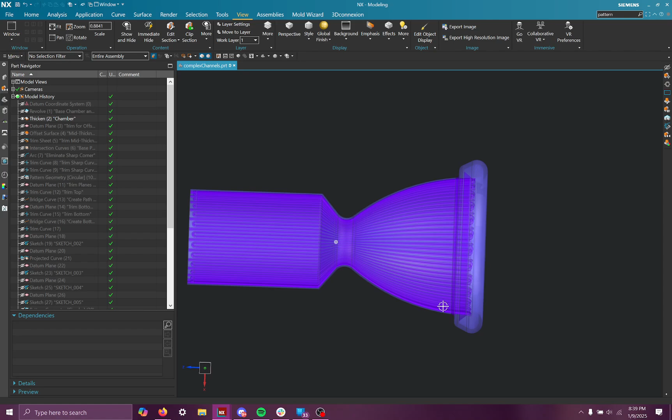So I made this regeneratively cooled chamber demo to show off some of the other channel making methods. This is very rough. None of my sketches are really constrained here at all, and I pretty much guesstimated what everything looks like. So definitely don't take this with any type of absoluteness about it.

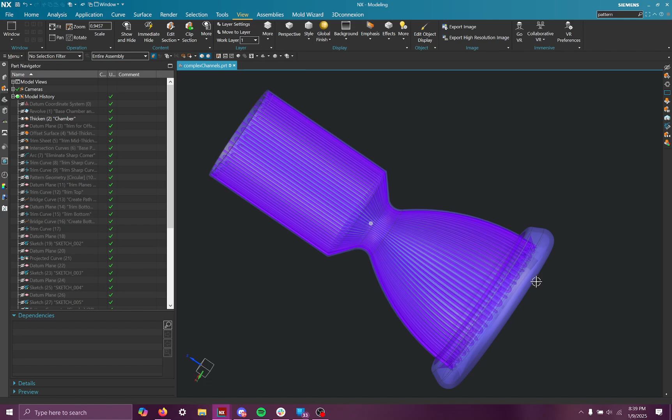This is just kind of using a familiar shape of a regen chamber to show off how to route some more complicated channeling through a curved geometry. And I think there are some useful aspects of doing this type of demo because I included varying channel thickness, or channel area, I guess, going through this chamber. Like it gets much thinner, kind of hard to see, but it gets much thinner by the throat and widens out as it goes through the nozzle.

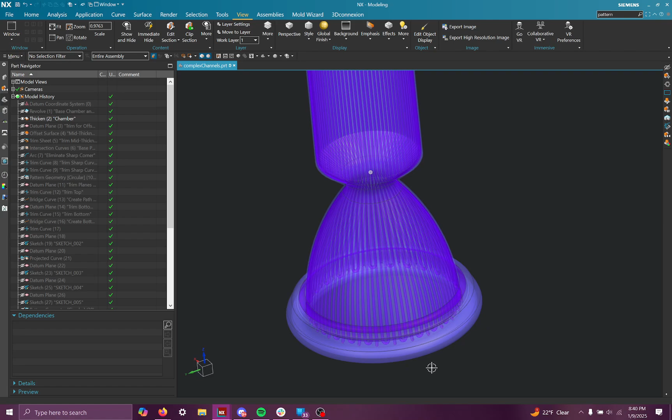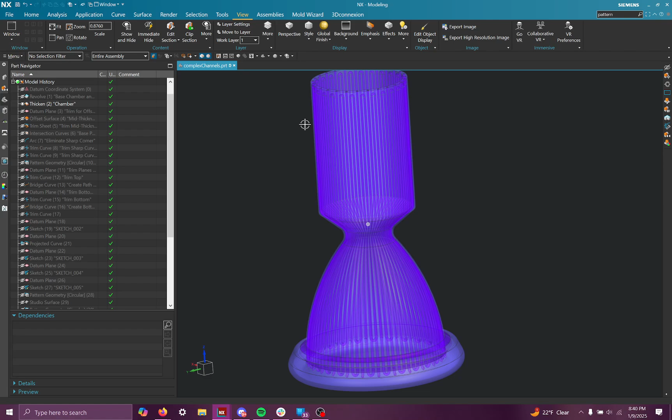And it's also a triple pass, very arbitrarily made a triple pass. I just wanted to show off some more channel making stuff by making it a triple pass. But in this video, I'll show you through the process that I used and point out some of the problem areas that you might face if you try to do something similar. Because while I think I found a pretty good method for this, there are definitely issues with it and possible areas of improvement as well.

All right, but let's get started here. I already have it made, of course. I'm going to mostly just be stepping through the timeline, and maybe I'll make a separate video where I recreate it from scratch, but obviously that'll be quite a bit longer than what this video is.

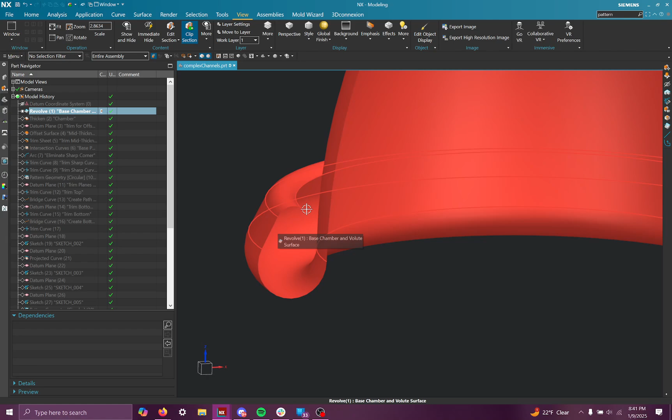But to start off, this is my base revolve. It's a sheet body for the chamber, and also I included a little bit of the geometry for the volute. I didn't do anything fancy for the volute, like changing area, going around the nozzle exit. I just kept it simple. This wasn't really about the volute anyway, so.

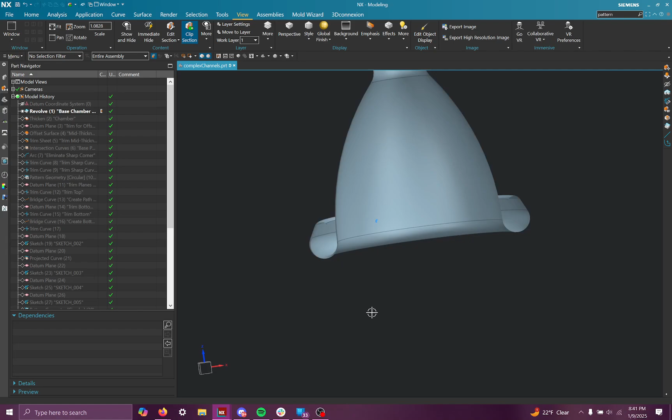But one thing to note is I didn't close out this volute because otherwise it wouldn't let me revolve this as a sheet body. It needs to be open at both ends to be sheet body compatible. But otherwise, this is just the outline for what the chamber will look like. And then I pretty quickly thickened it to make it into a solid body. I think I applied like 0.2 inches to it. But again, none of the dimensions really matter for this stuff.

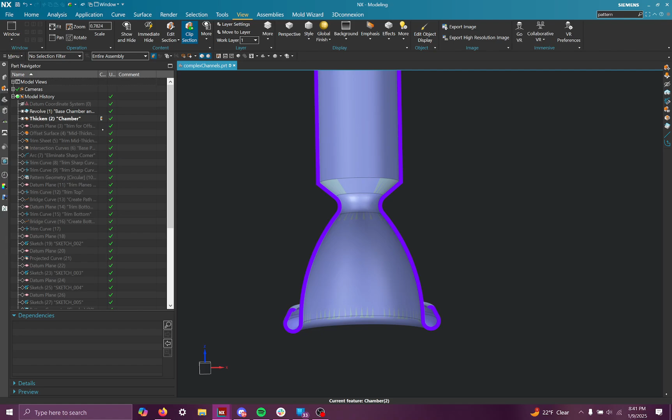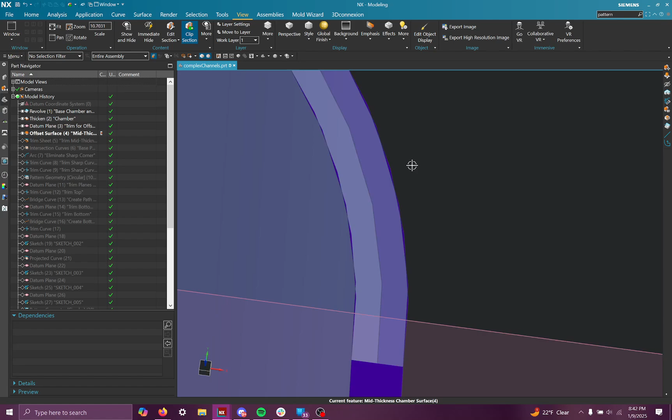Okay, so then I knew that I wanted to create a surface that is placed within the middle of this thickness, which actually, if I jump down one more step, you can kind of see it there. I'm going to hide that revolve there. Yeah, see that little gray surface in the middle? That is used as a surface to create a curve from for the initial path that the channel will use.

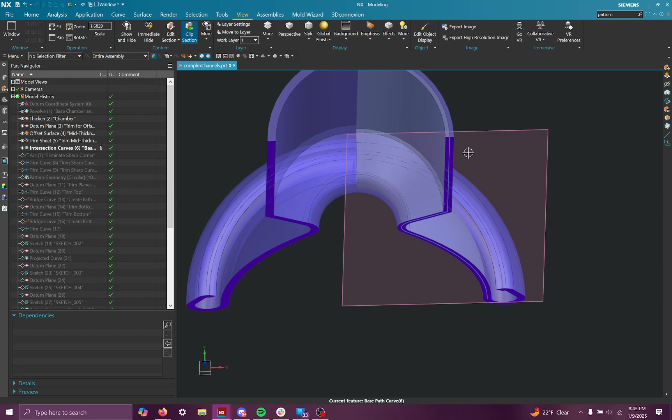And the reason I have this plane here is to trim down that surface in the middle so that I don't have two curves. So if you ever use intersection curve to make curves from intersecting sheets or planes, if you have a set of surfaces that intersect twice, it'll create two separate curves in the two places where it intersects, and I wanted to avoid that.

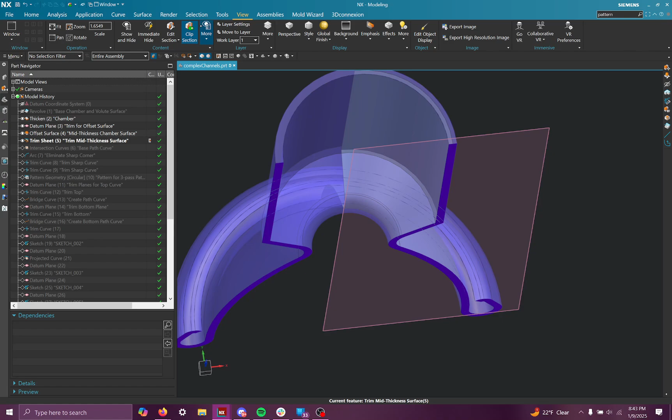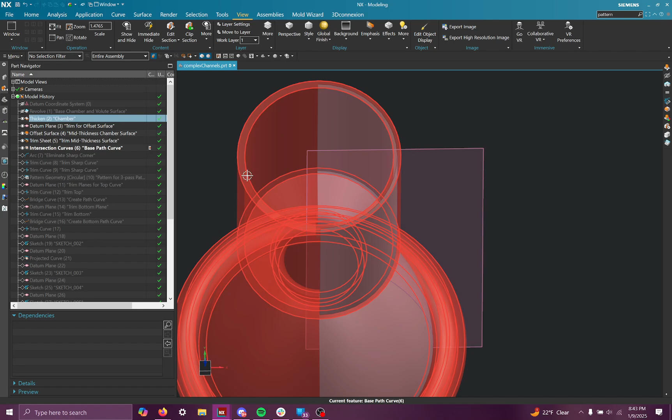And by doing a trim, I made this trim sheet that cuts down on this sheet body. So this is it originally. I cut it down to be just that, so that when I used this plane and I used this sheet, it created one curve instead of one here and then one on the other side. That just made my life a little bit easier going forward. Very long way of explaining that.

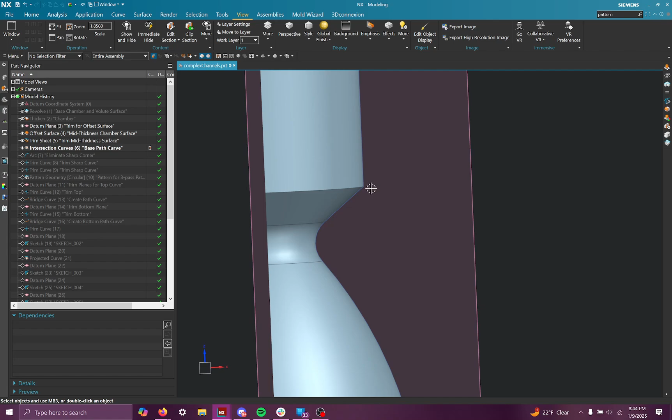So after I got that part of it, one thing I wanted to highlight before, the way I designed this chamber was very intentional. I left in a sharp corner without a smooth curve transition here, because that is kind of an edge case that you need to address once you want to use your chamber profile to eventually be your path for the channeling. So I addressed that. Let me get rid of this trim sheet.

I addressed that with adding in a little arc, and you can find the arcs from the curve tool, and you need to pretty much define a plane for that arc to operate on, and then it's almost like you're in a sketch.

You just use a 3-point arc. Click on that line and then that line, set them tangent, and then define the radius. It's a pretty simple tool to use, especially if you want to avoid being in a sketch. So I made that arc to clean up the geometry a little bit and avoid

using this sharp cusp almost in this corner. And then, you can't see it, but I trimmed out these two lines here to only allow that curvature in this curve that I'll eventually use to define part of the path for the channel.

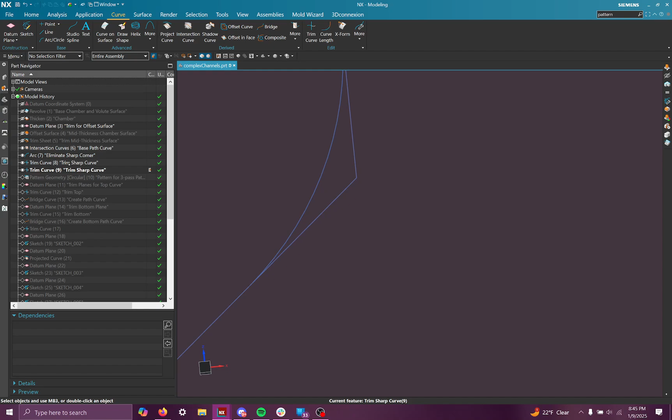But trim curve is weird. I don't know why it does this, but it's always hard to change whether it's viewable or not. Sometimes it is, sometimes it isn't. It doesn't show up after you apply it. You just have to trust that it worked sometimes.

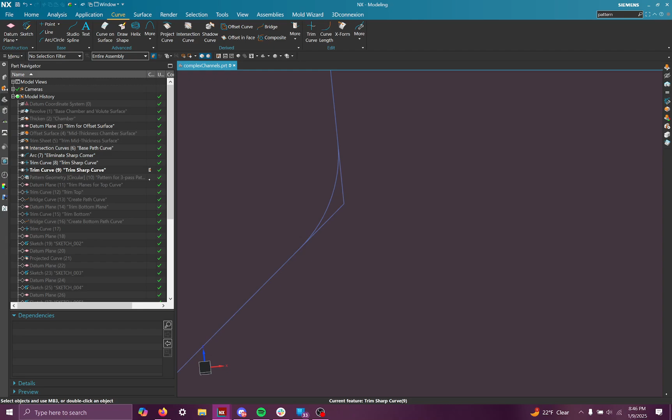But imagine these two straight bits being trimmed off. And then with that, I knew I wanted to do a triple pass with this Regen chamber, just to demonstrate some more complex stuff.

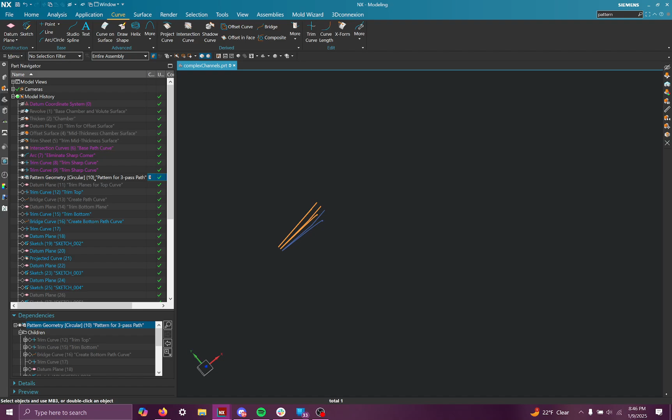So I used pattern geometry to pattern that intersection curve with the added little arc there 3 times, and I picked that was my parameter for the span angle.

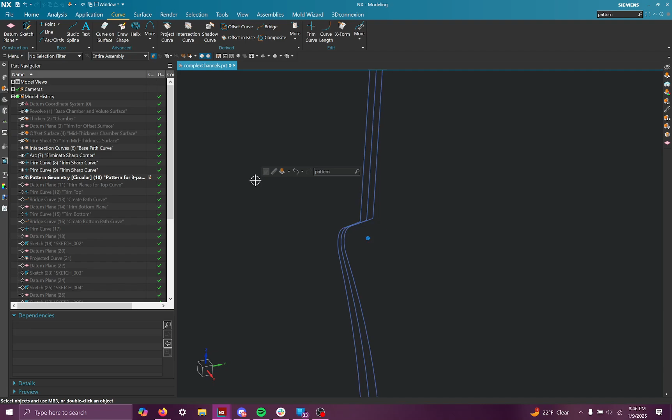Very arbitrary again, but one thing to note here is I'm using pattern geometry instead of pattern feature. I typically like to use pattern geometry when I can because it tends to be a little lightweight, a little more lightweight compared to pattern feature. And I don't even, that's typically why I use it.

Sometimes you have to use pattern feature though. This case doesn't really need to be lightweight since I'm only doing a 3-pass pattern, but regardless, after that I

made another plane. I tend to define a lot of planes to help trim down stuff, and this plane is used to trim down the top parts of, that's our chamber, the top part of the chamber channel curves, specifically

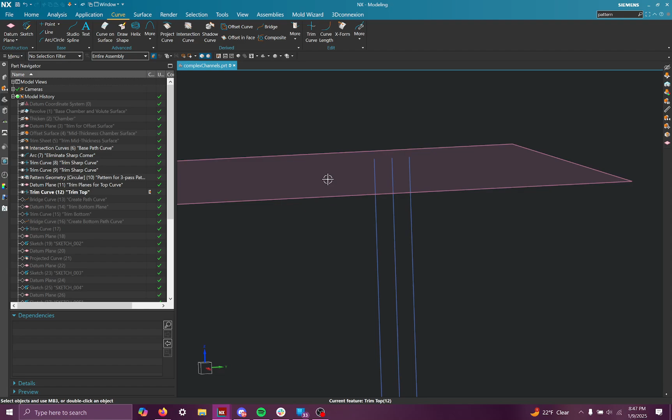these two. I trim them down, and of course it isn't going to show it when I move on to where I do that operation, but I trim down these two lines at that plane to eventually make room for a nice curvature with which I make here with the bridge tool.

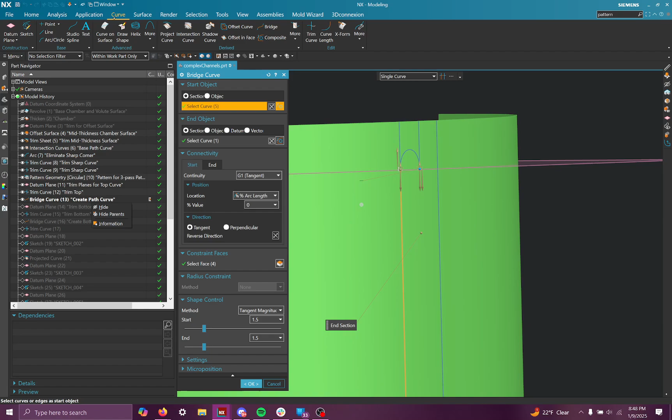The bridge tool is really cool. I think it's pretty useful and very versatile, and it's not something you need to enter a sketch for. You can just use the curve menu, and it's right there. You pretty much just click on the 2 lines you want to connect, and it will automatically make a curve

to connect them that keeps tangent, keeps it to be tangent to both the initial curves you selected to connect, and you can adjust what those tangents look like by a shape control.

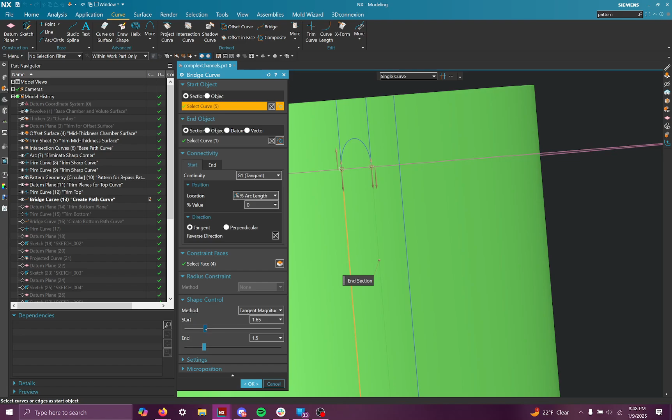And the part that makes it really useful for this case, where we're having these channels curve around a little bit to match the radius of our chamber, is you can constrain this bend, this little bridge here, to a face.

So I selected the trim down mid surface that I used to define the initial curve from as what this bridge should adhere itself to.

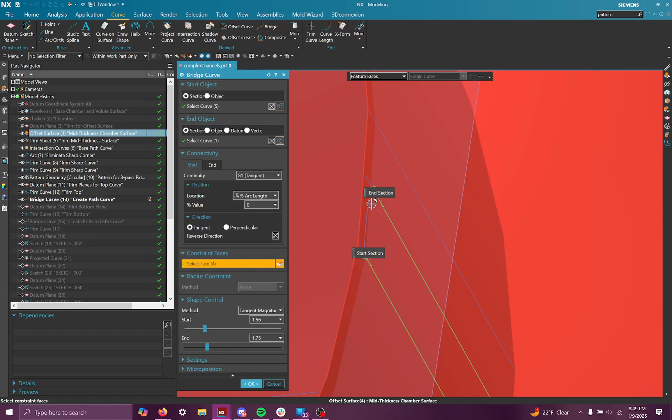So it's sticking to this curvature as it arches over, which otherwise it would just take the shortest path, which would intersect with this face here, which is not what we want.

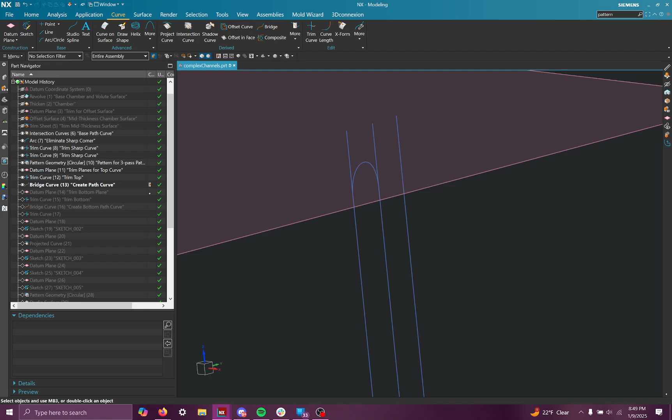So it's a very cool tool. I recommend it when you ever need it. And I do the same thing at the bottom as well.

This plane is a little bit out of where it should be, but it doesn't really matter for planes. But this plane is just used to trim off.

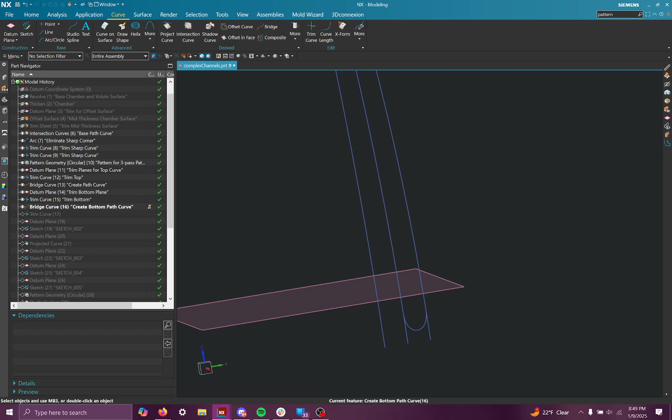Instead of these two curves, I trim off these two curves to add in another bridge using the same methodology of adhering it using constrained faces to the trim surface, the surface that goes through the thickness of the chamber that I used to define that this original curve profile.

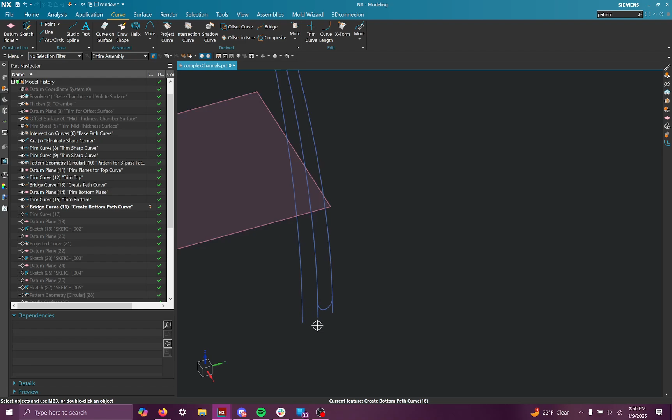And then I used trim curve to trim out those two straight bits that extend past that bridge. Okay, so after that, we have 3 nice connected and continuous curves that we'll use for our eventual path for a channel.

Now we have to define the profile of the channel, and that's pretty simply done as well. We just need a very small plane here. I'm gonna have to zoom in a ton. This plane is, I believe, an on-curve plane.

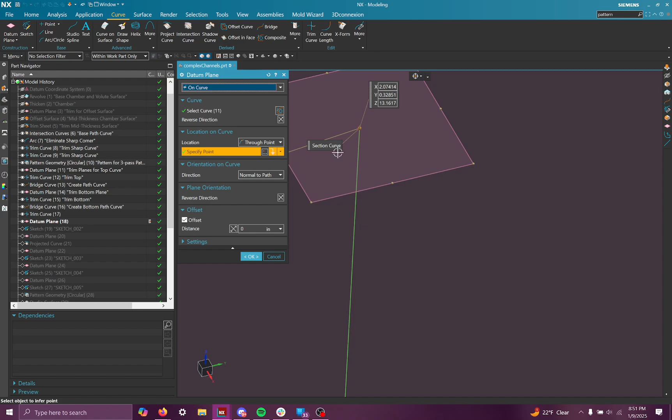If you are unaware, there's a ton of different ways you can define planes, and more likely than not you can find one that works for you. There are at least 2 that work in this case. One of them is point and direction—you pretty much just click on the endpoint of this line and it'll populate that plane—but I did on curve for this one, which also works. So we define that plane at the end of this curve.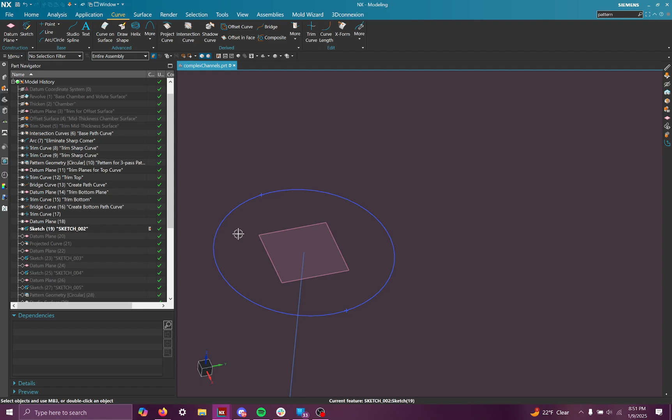Then I pretty basically just drew out a circle, about 0.1 inches in diameter. You might notice these 2 points—I might talk about them later. They were almost a debugging tool that I used later on, and we might end up talking about it, but I used a circle as the profile for the channel.

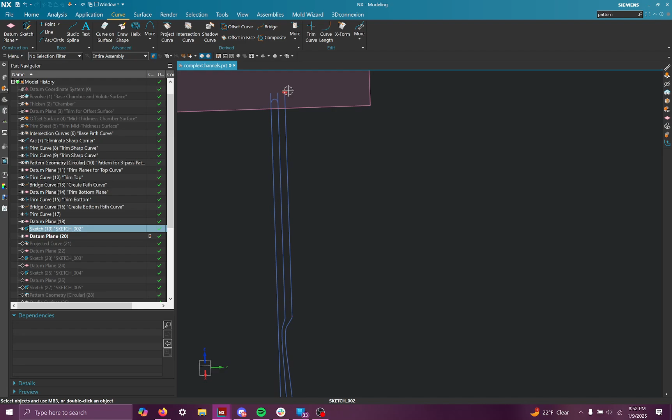If you want it to be more fancy, you can maybe use a teardrop shape if it needed some overhang, but circle it is. I knew I wanted to have changing diameter, or changing area, of the channels going through the path. Earlier tests I did with this method, without having a changing area, kind of looked weird because you'd have to have really skinny channels throughout the entire thing to make them all fit in the throat area where the paths get a lot closer to each other, which isn't something you would probably design to be like that.

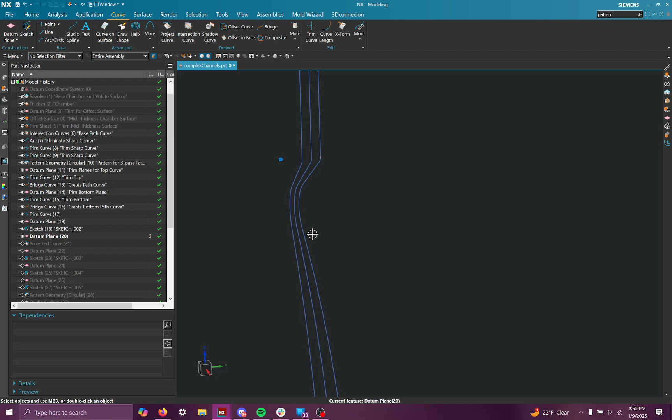I think typically you have changing channel areas for heat exchangers like this one, so I wanted to demonstrate that a little bit. To do that, I'm going to define planes going throughout the length of this curve. I only define planes along one curve, and then I will eventually pattern them to the rest of the other 2 curves.

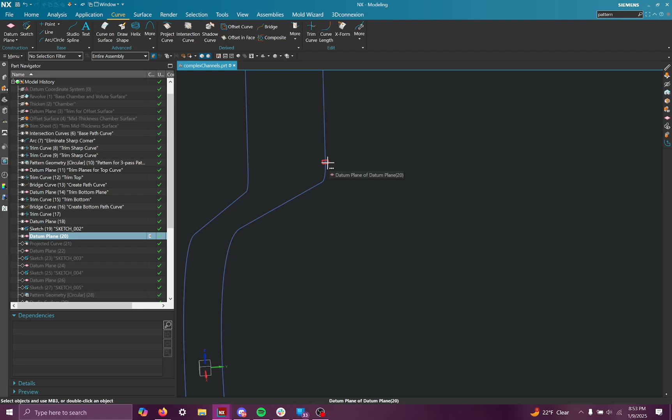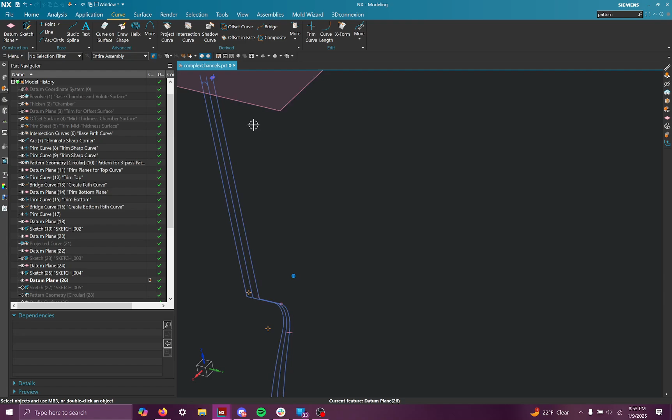So we're only going to follow one curve for now, but I'm defining planes at places where I anticipate a change in profile for the channel. So here's one of them, here's another, there's one, and then there's one at the end as well, right there. At each location where these planes are, I'm changing the diameter of that initial circular profile for the channel.

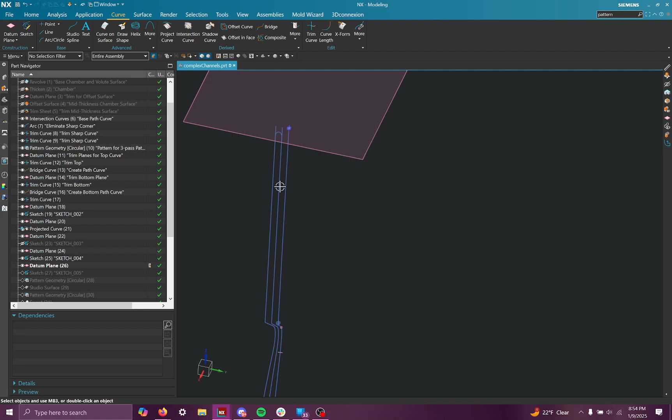I actually do add in the profiles for the channel. This one is just a projected curve from the one up here—I just drop it down using this straight line as a vector. You can also make it a sketch there. I think it's a little weird that I, out of the blue, used a projected curve instead of just a typical sketch. Then I made another profile for the channel.

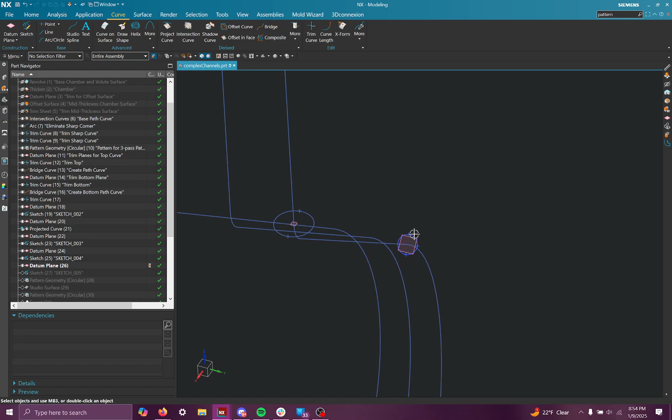This one is noticeably thinner as it gets closer to the throat—you can kind of see the difference. I made another one there, at the next plane location, and then I have the final one down here, which goes back to a much wider channel width. So you get a varying channel diameter through the path.

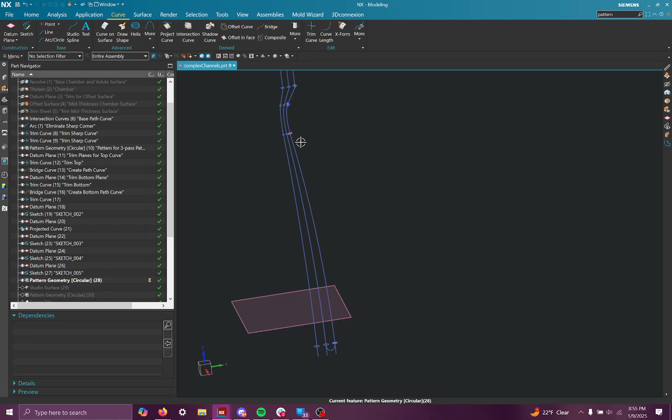I anticipated having the same change in diameter as it goes up and down again, which is done by the pattern geometry, where I take the list of these different channel profiles and just pattern them through the other two paths.

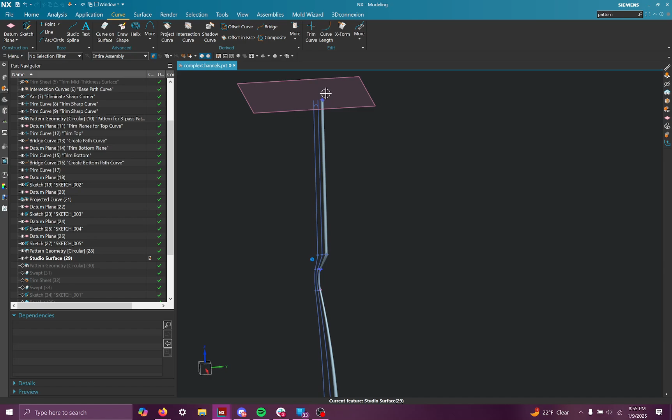Then we really get into the more complicated stuff, and I had a doozy of a time trying to figure out a good way to complete this sweep from the top to bottom using this relatively complex curve guide. I guess not too complex, since it's on a plane, but having it change diameter was pretty hard to find a good way to do.

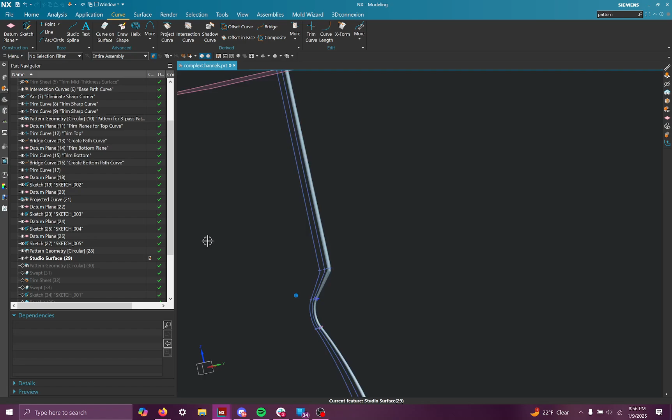I'm not entirely happy with this. This was just the best way I found, which was using a studio surface, although I'm pretty sure a sweep, just a simple swept tool command, would do the same job. The key was using the alignment by points, and really just trying to be careful about how you align it by points.

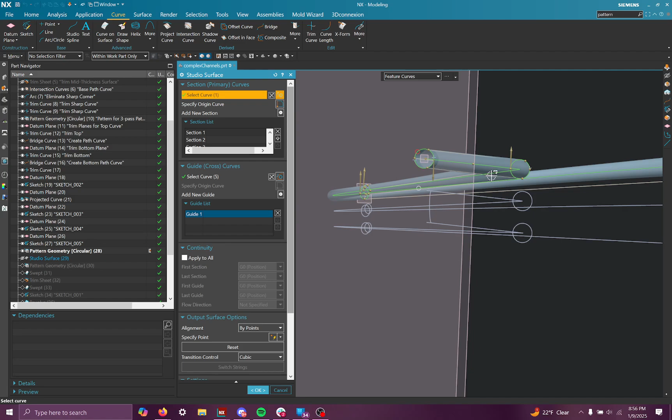When you initially make it with swept and circular profiles like this, it'll be all twisted up. It's very annoying—you pretty much have to hand sculpt this.

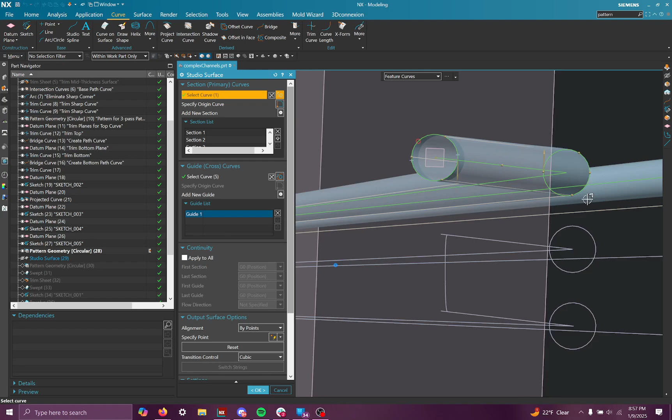Studio surface, or swept, to make it look the way you want. Realistically it probably isn't going to be entirely dimensionally accurate. I'll do a little demo of what it was like—you have to grab these tangent points and move them around, and you can see I'm changing the shape.

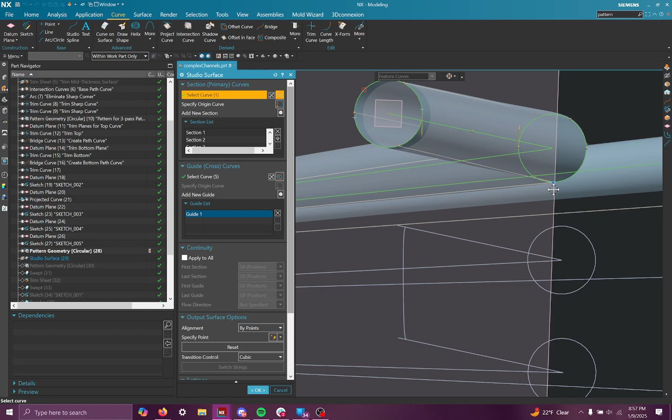of what it looks like between those two circular profiles. And sometimes you get these weird conditions where it's snapping to somewhere you don't want, and it messes everything up. So imagine that, but everything is all twisted up to start with, and you have to do it through the entire length of this channeling.

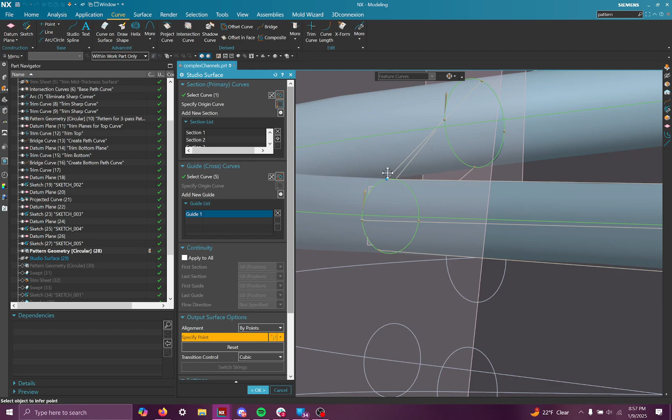It's a little bit annoying for sure. It probably took me like 5 minutes to do the whole thing, which isn't the worst, I guess, but isn't ideal either, and you're probably getting a subpar product by the end of it. So if you have any better ideas, definitely let me know, because this can definitely be improved.

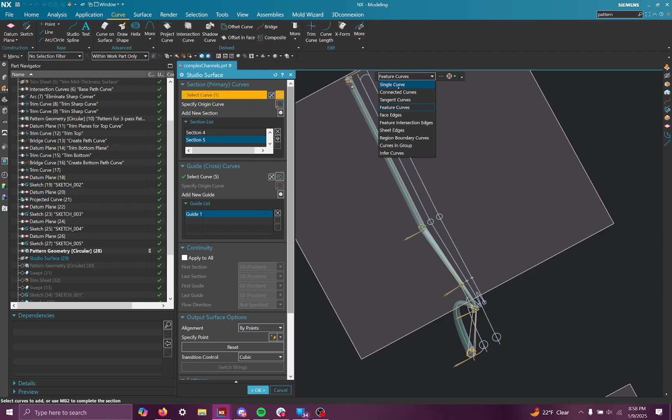So yeah, besides the point—or I guess part of the point. To start, you just select each one of the circular channel profiles as you go down this path. Each one of these sections is another circle; you can see the changing highlight there is another one of those circular profiles. And then the guide, I just used a single curve here, carefully selecting the continuously defined curve that I wanted.

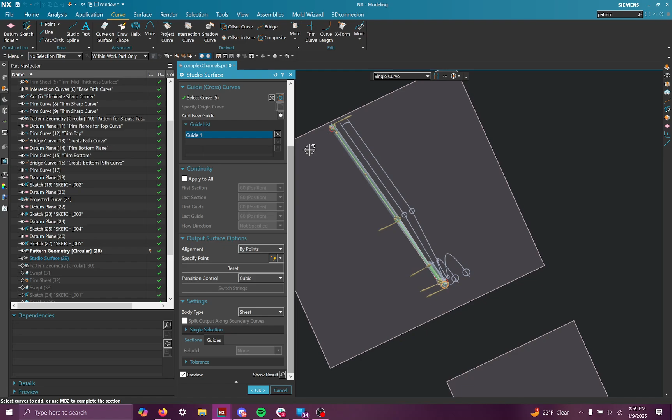Another good point: the body type I used for this was sheet, because I wanted to eventually use trim body to cut out the negative, or essentially add in the channeling instead of a subtract. I found that using surfaces like this and using trim body tends to be a bit lighter weight and has a quicker load time than just using subtract—you can have multi-minute loads using subtract on complex stuff like this. So to keep it lightweight, I chose a sheet surface body. Can do it either way though, honestly.

Okay, so that was definitely the hardest part and most tedious. In fact, it took me several hours to settle on using this tool. But yeah, it worked pretty well.

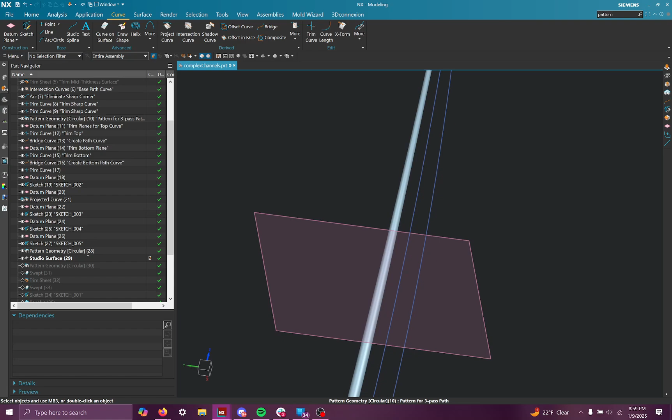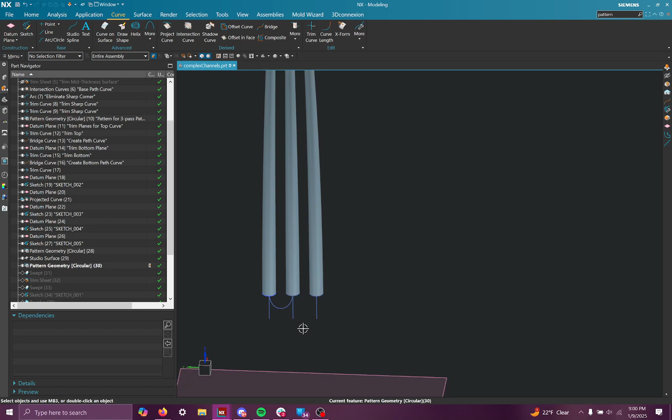Then after that, I patterned that sweep, or that studio surface, 3 more times. And you might be wondering why I bothered originally patterning those paths if I'm only doing one sweep and then patterning the swept afterwards. The real answer is I didn't really know what I was going to do, so I figured I'd need to pattern the paths, the curves, 3 times just in case. So there wasn't really a lot of forethought there, but eventually it was needed.

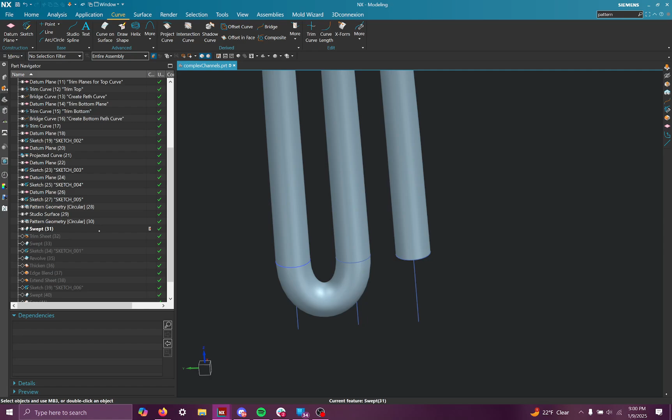The next thing I did—obviously these are 3 independent channels right now, not connected by the bridges we made earlier—so I added a little swept that uses that bridge curve as the guide for adding in another surface. And then up here is just a trim to bring down those sheet bodies to be at the same level, taking advantage of that bridge again, which is done there.

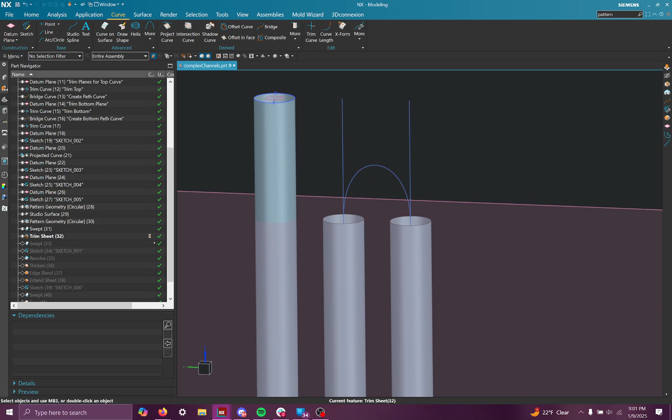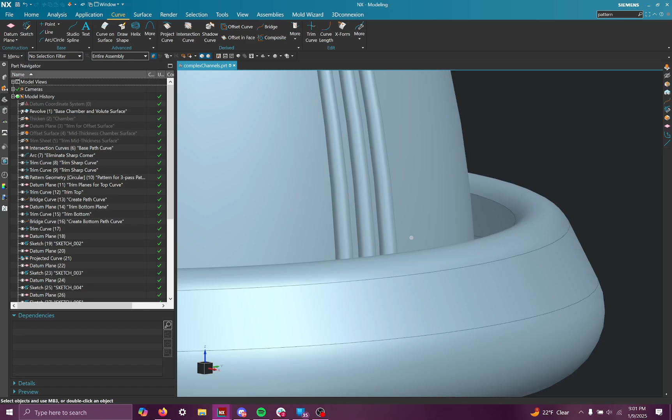We're kind of in the home stretch here. One thing I needed to do is handle this little entryway to the channeling. If I go back here and show you what our volute looks like, I needed to find a way to get this channel opening up in the volute.

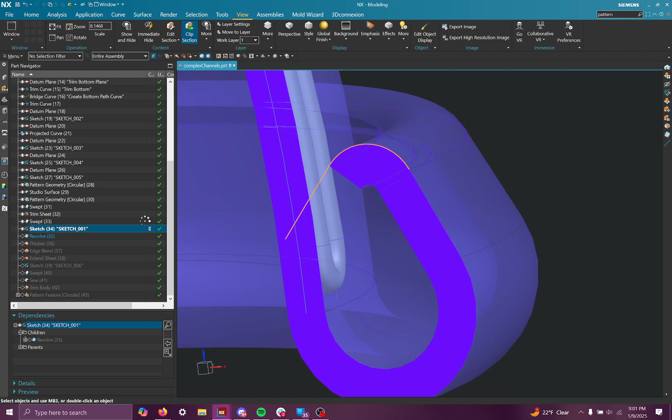So I ended up using a sketch to do it. Oh, this is a different sketch actually—I'll go over this first. This volute is still open; it has this gap in it that wasn't able to be defined when I originally made it, to allow this to be a surface. So I needed to close that out here.

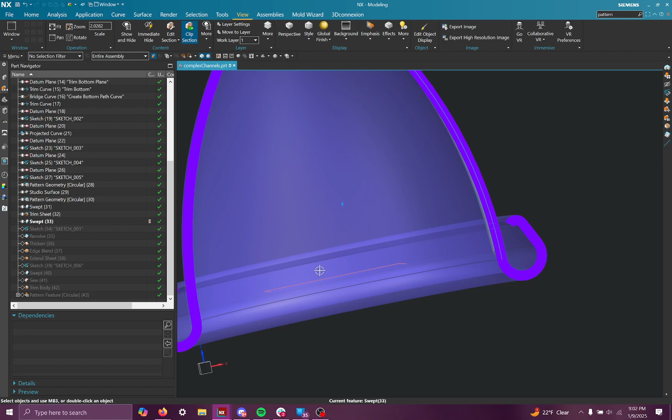This was another thing I battled with a little, because I swear there should be a tool like extrude, but instead of extruding in one vector, it contracts or something—like grabbing this surface that wraps around the entire volute, this little flat edge surface, and extending it inwards from all sides toward a central axis. I hunted around for a while.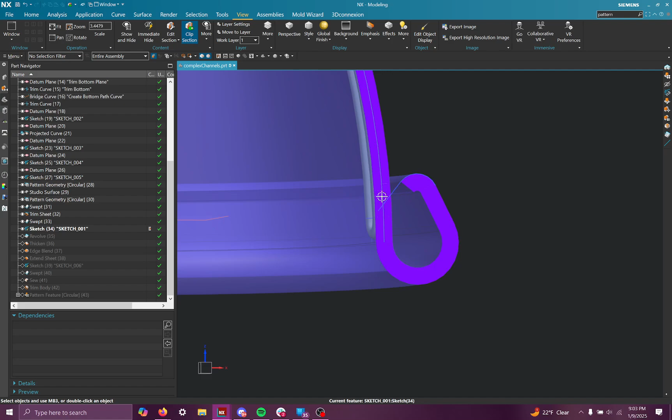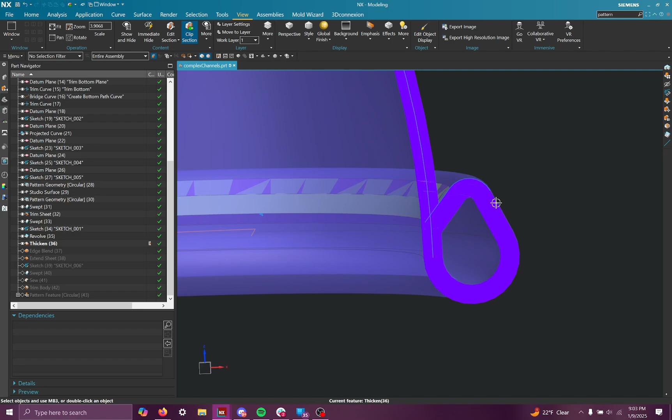I didn't find anything, so I had to settle for creating a sketch like this, where it bridges from the top surface here, extends it into this chamber wall, and then I revolved that around 360 degrees, then thickened it and unioned it to the volute and to the chamber, since they're the same body.

So I followed those 3 steps, which it makes me so sad that I couldn't find a tool to do it a little bit cleaner. But this works. I'm not too unhappy with it. I added in an edge blend just to make it not have a really sharp internal corner, because, even though this is an imaginary part, stress concentrations were bugging me for that.

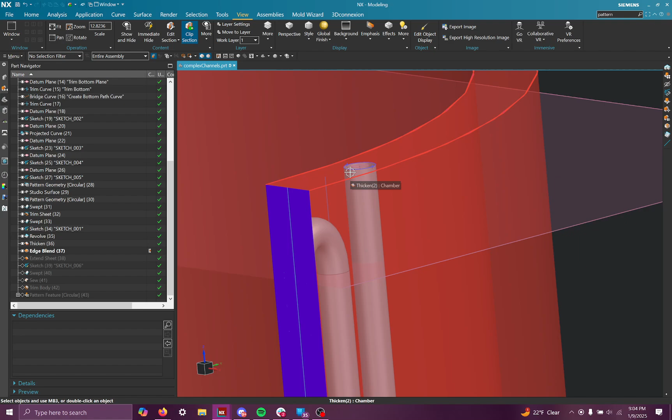Okay, anyway, after that was done, I knew I needed to extend out this exit for the channel, because if you ever have a situation with a sheet, or really even two bodies that you plan on applying a Boolean operator to, like subtract, if you have a situation where they're intersecting each other at the same plane, like this one, where both the solid body here and the sheet body are being cut off at the same plane, you will have issues.

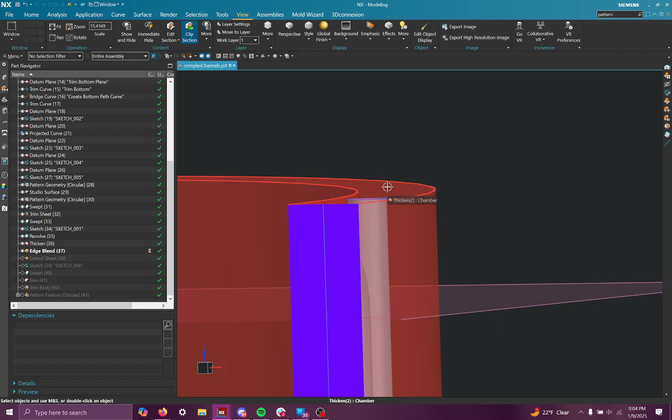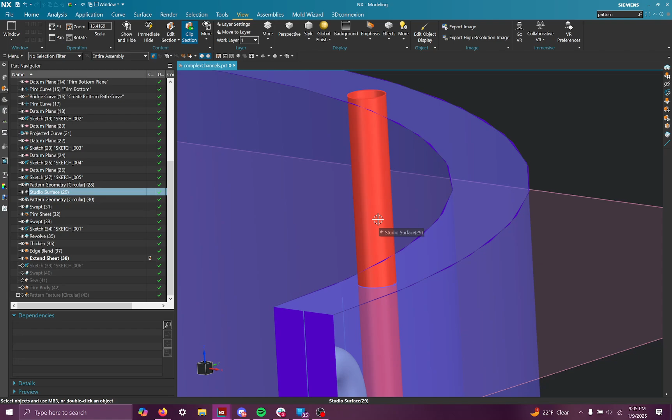There's a very common error called, I forget the name of it now, but it's something along the lines of intersection, or like bad intersection. Your two bodies or whatever have a point of zero thickness. You'll know it when you see it. It's very annoying, and it necessitates adding in a little bit extra length to whatever geometry you plan on using a Boolean on to prevent areas where you have overlapping at the same plane.

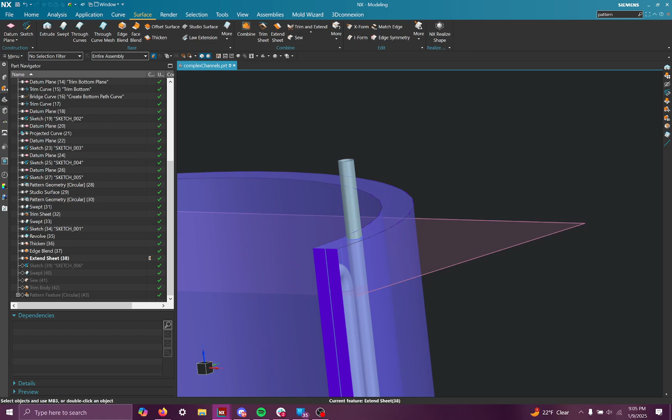So in this case, I extended out this channel just to bring the top of the channel out from the top of this solid body. And I used extend sheet. It's a very good tool to do that. Very simple. Just click on the edge of your profile here and choose how far off it should go from that edge. Okay, so going back, now that I'm back to getting an entryway to our channel, turn off this clip section.

So I need a way to get the fluid from this volute into this channel here. And right now it's just straight down. There's no connection point between the volute.

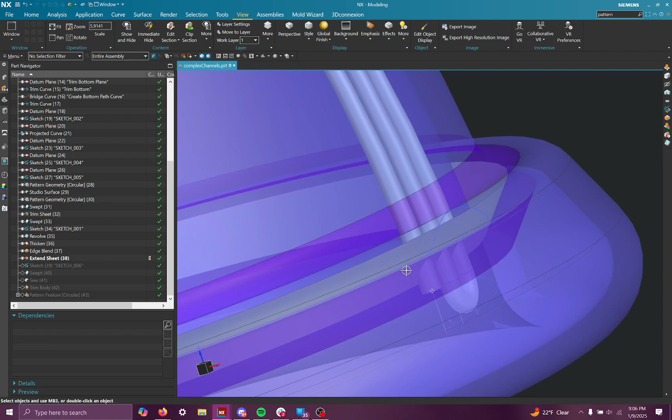Oh man, sorry for really bouncing around a lot with the display. I've been told before that the way I handle CAD has made people nauseous, as third-party watchers of me fooling around in CAD. I hope that isn't happening to you. If it is, I apologize.

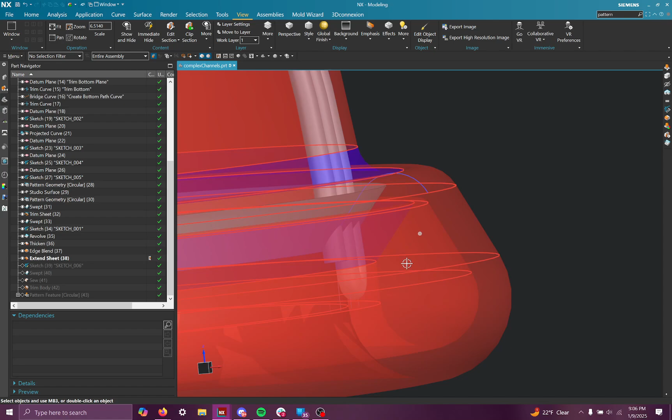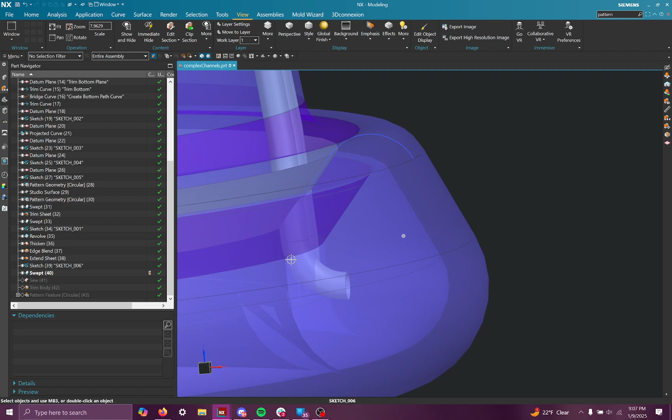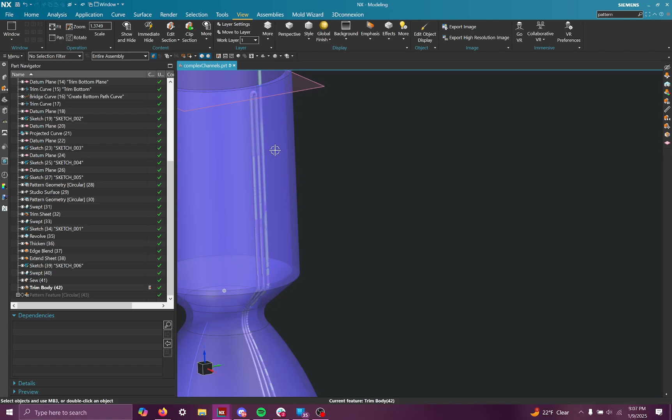Anyway, I need to find a way to get fluid from the inside of this volute into this channel, and I do that with a sketch. It's going to be hard to see unless I hide that. I add in this sketch here, which I'll use as a guide for another sweep, and then that will lead itself into the interior of this volute here. So there's a way to get fluid into the channeling. And then once I do that, I sew together all the little channel bridges, this entryway, and all the other paths for our channel together, so I can use a trim body to subtract from our solid chamber wall here.

And then very simply, I just pattern that trim body feature. I know I said try to stay away from pattern feature. In this case, the trim body was a feature and it isn't really a geometry, so I just used pattern feature there and kind of got lazy a little bit. I'm sure there's a better way to do it. But that leaves us with our finalized, in quotation marks, regen chamber. I'm pretty happy with it.

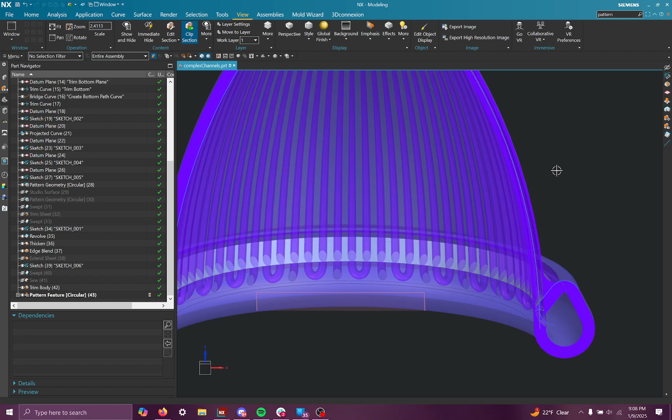I did a little bit of tweaking, but if you look at the throat, really cool how it thins out towards the throat and then expands back towards the nozzle. It's a pretty cool piece to look at because there's so much going on. But yeah, it wasn't that many features looking back, and you can definitely find a way to cut it down even more.

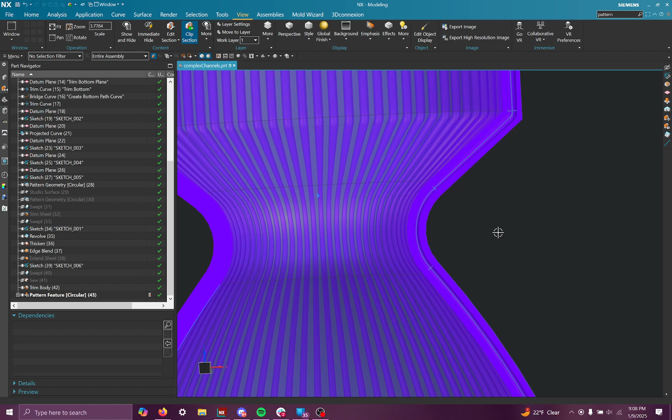I hope this was somewhat informative and useful. You might be able to apply this type of modeling where you're using a lot of curves and surfaces to other things, but I find it especially useful for cooling channels like this where you have a lot of winding paths. But anyway, hope that was useful.